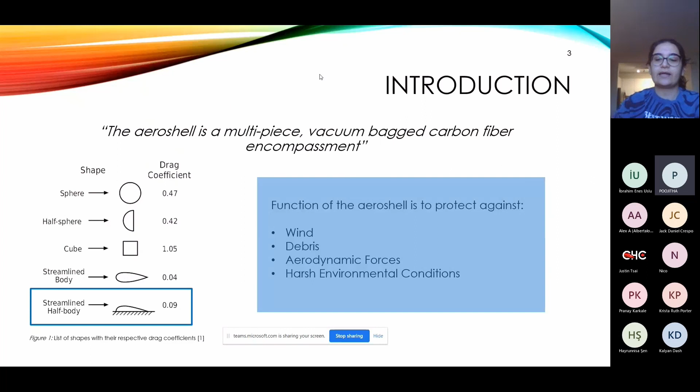The reason why we picked carbon fiber as the material of the Aeroshell is because of its unique properties. Carbon fiber is known to have a high strength to weight ratio. According to Zoltek, carbon fiber can be up to 5 times stronger than steel and twice as stiff, while bearing the same modulus of elasticity of 200 gigapascals. Carbon fiber also has good vibration damping, high fatigue, wear, and corrosion resistance. But corrosion still persists as an underlying issue when other metals are involved.

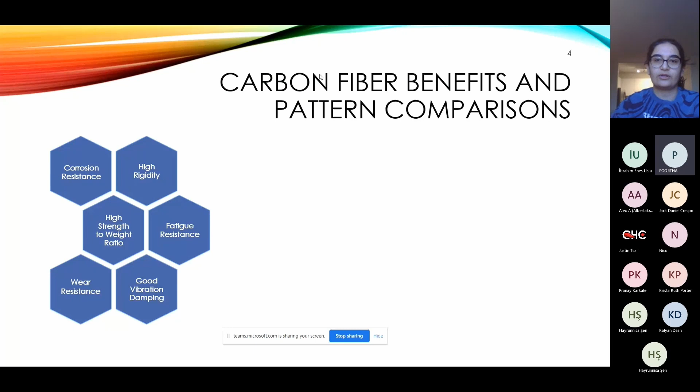We selected a 2x2 twill weave pattern as the most suitable pattern as it can conform to complex contours, has good pliability, and few stress concentrations. It also has great functionality, moderate stability, and formability. Another pattern is the plain 1x1 weave, which has a higher level of stability, but is not as pliable nor as well suited for layups with complex contours. It also has a lot more crimps that create stress concentrations and weaken the weave over time.

The third pattern I would like to highlight is the unidirectional pattern, which is oriented in one direction, so you can tailor the layup however you'd like. However, it tends to fall apart and hence has poor workability, and it usually needs a bottom and top layer of woven carbon fiber when doing layups.

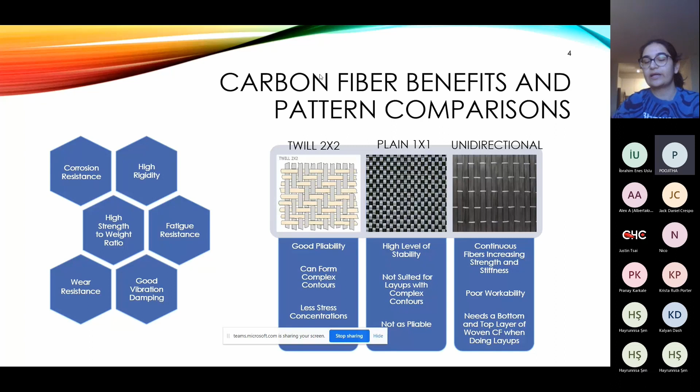Knowing the material that we were working with, the team decided to experiment with molds, infusion, and layups. In SolidWorks, 3 different 3D pattern molds were designed: the flat plane, the female hemisphere, and the arc. Each set was subjected to one of 3 curing conditions to determine the most optimum curing setting. The decision was based on rigidity and curing time. The molds were optimized to eliminate any sharp edges, to avoid air pockets from the layups, to reduce stress concentrations, and to allow for easy removal from the molds.

For all conditions, a generous amount of wax release agent was brushed onto the molds. 3 layers of carbon fiber were applied per mold, and the molds were allowed to cure for 5 days. For the preheating set, 20 milliliters of epoxy resin and 20 milliliters of hardener were separately heated in a 40 degrees Celsius water bath and then mixed. The heated mixture was thinly applied to the molds and between the carbon fiber layers, and the composite was left to cure for 5 days at 20 degrees Celsius. For the regular set, there was no preheating of the epoxy resin and the hardener. For the post-heated set, the carbon fiber parts were continuously heated over their curing time of 5 days.

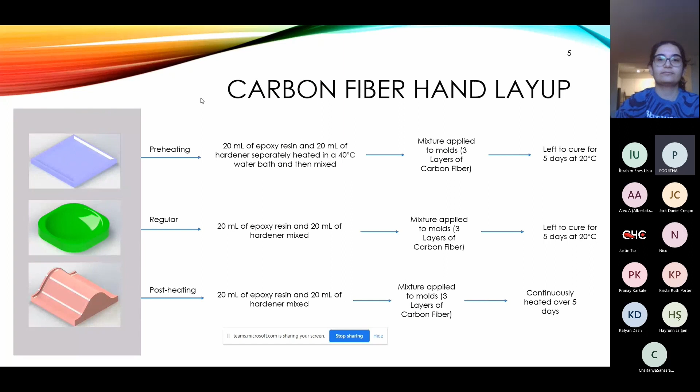So this was the product of our experiment. On the leftmost side, you have the regularly cured. The middle set is the preheated, and the rightmost set is the post-heated. What we notice is that adding thick coats of epoxy resin and hardener will result in a more flexible part. The resin carbon fiber needs at least 5 days to fully cure, and it is best to avoid humid or enclosed environments to avoid prolonged curing time and a less rigid product.

The best curing condition out of these 3 variations was achieved by the preheating of the epoxy resin and hardener, as all parts exhibited higher rigidity and an easier removal from the mold. The female hemisphere, relative to all other designs, was the hardest to remove, indicating a potential challenge posed by the aeroshell shape.

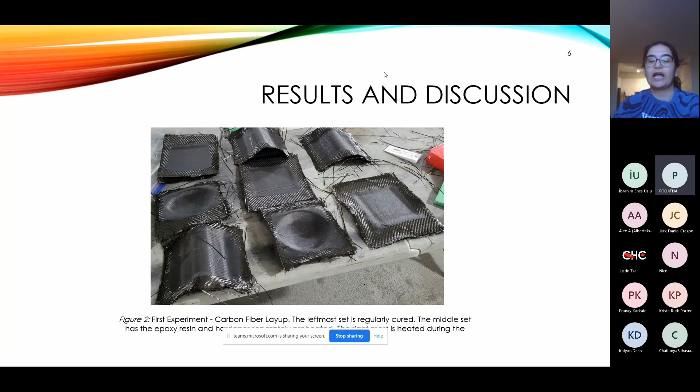There are 3 tests that we're hoping to get into. The initial vacuum bagging fiberglass mold testing, which we are doing to understand how vacuum bagging works, the properties of fiberglass and gel coat, the properties of the finished part, and to reduce supply, demand, and cost, and the use of low flashpoint chemicals. So there will be 9 foam molds with 3 layers of wetted polyester resin fiberglass and 3 layers of epoxy resin bound carbon fiber layers.

The composites will be vacuum bagged. 1 set of 3 molds will be brushed with gel coat, another set will be covered with packaging tape, and the 3rd set will be covered with a release film. The second test will be mold infusion, where 3 fiberglass molds will be prepared based on the results of the previous test. The epoxy resin and the hardener will be drawn through by spiral tubing and point sources, spread along the length of the part by vacuum bagging. This will refine our understanding of the infusion vacuum bagging process.

The 3rd test will be the manufacturing of the small-scale aeroshell, which is 1/3 of the scale, where the plug will be made out of foam covered with fiberglass, and the distribution of the resin hardener mixture throughout the mold will be through infusion. From the results of the previous tests, the manufacturing of the large-scale aeroshell will be optimized accordingly. And lastly, the testing of the aeroshell will include mounting onto the pod and wind tunnel tests, where we hope to ensure proper laminar flow and avoid as much as possible the formation of vortices. And the design will be optimized accordingly too.

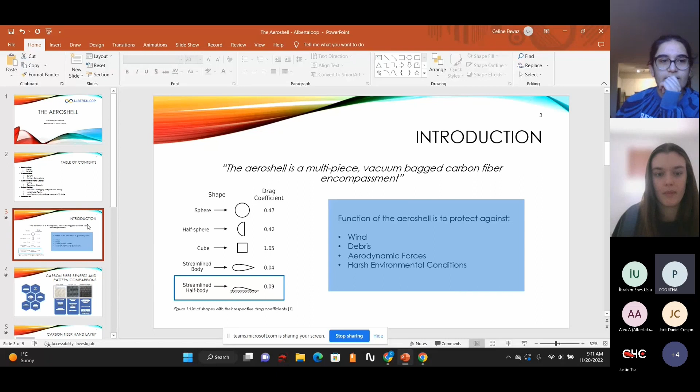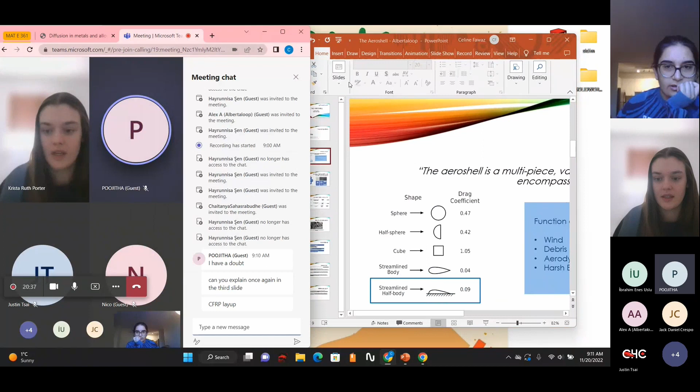Cool. Poojitha, did you want to ask a question? Can you explain the 3rd slide again? Yeah, sure. Okay, I'll just reshare my screen here. Okay, this slide. Just to make sure, is it this one that you're talking about, or do you mean this one? The comment just said, can you explain once again the 3rd slide? So Poojitha, do you have a specific question about the slide, or you just want the whole slide explained? CFRP layup. So the procedure, this one. I think so, yes. Okay, awesome.

Yeah, no worries. So basically we did 3 molds. We designed them in SolidWorks, and we optimized them to remove any stress concentrations and to avoid any future issues. And we subjected them to one of 3 curing conditions, because we're trying to understand what would give us the most rigid product and what would take the least curing time. If we preheat, we heat the hardener and the epoxy at 40 degrees Celsius separately, then mix them together, and apply very thinly to the mold and between the carbon fiber layers, which are 3 layers, and leave that composite to cure for 5 days at 20 degrees Celsius. Whereas the regular is just the epoxy resin and hardener mixed, applied immediately and left to cure for the same amount of time.

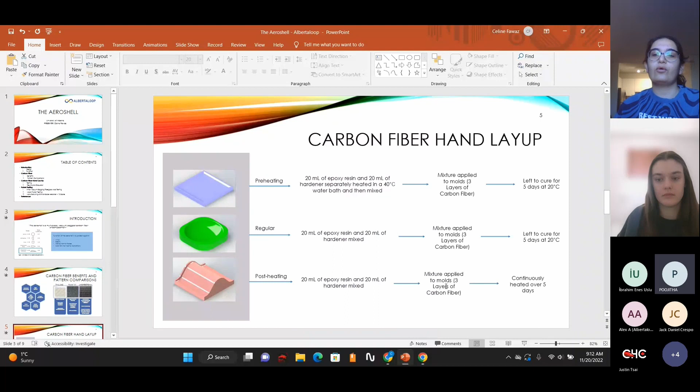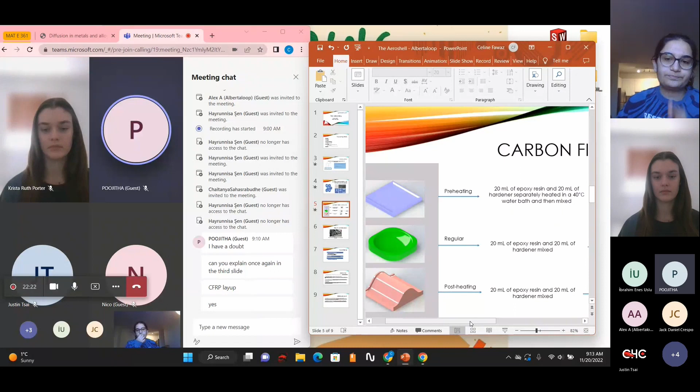And the post-heating is where you continuously heat the finished product. So after you apply the epoxy resin hardener, you continuously heat it for 5 days over its curing time. So that's the difference between the 3 curing settings. And what we found out is that the preheating one is the best. So it's best to preheat your epoxy resin and hardener separately and then mix them, instead of just mixing them regularly or continuously heating the carbon fiber resin mix.

Yeah, you're welcome.